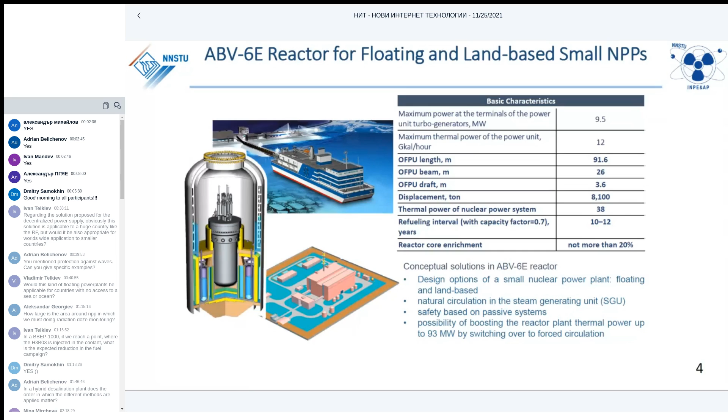The land-based small-sized nuclear power plant incorporating the ABV-6E reactor plant is a power source fitted with a land-based modular transportable power unit and equipment to load and unload the modules. The advantage of the modular transportable power unit is that protective waterside structures and special devices to transmit power to shore are excluded.

There is a possibility of setting the small-sized nuclear power plant far from water sources. Ice and tsunami protection is excluded. The modular transportable power unit has small overall dimensions and weight compared to a floating power unit.

This is what the floating power unit Akademik Lomonosov looks like, within the floating nuclear cogeneration plant in Pevek, Chukotka Autonomous Okrug, Russia. The floating power unit, the main component of the plant, incorporates two reactor plants. It is an upgrade on the reactor plant used in

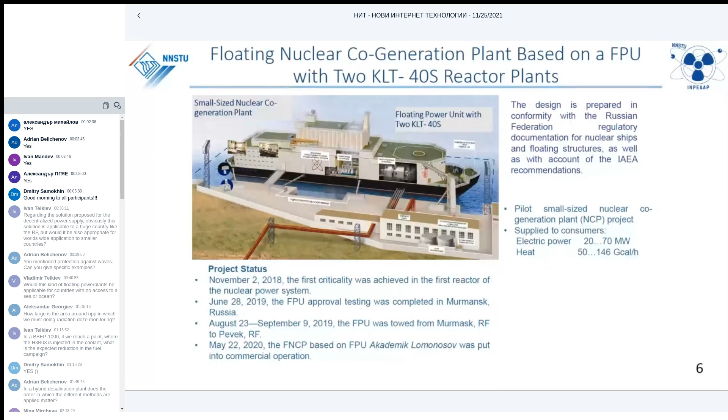The small-sized nuclear power plant has the following design options: a land-based small-sized nuclear power plant incorporating the RITM-200N reactor plant, and a floating small-sized nuclear power plant incorporating the RITM-200M reactor plant.

The land-based version of the small-sized nuclear power plant incorporating the RITM-200N reactor plant is designed to generate electricity. Additionally, a possibility has been provided for fitting the small-sized nuclear power plant with district heating and desalination plant if necessary.

The small-sized nuclear power plant includes the following buildings and structures: main building, special building for 2 units, pump station for supplying service water to the turbine building, administrative and living quarters unit, and others. The main building incorporates a reactor unit, turbine unit, and engineering system units.

As a power source for the small-sized nuclear power plant, the RITM-200N reactor plant is adopted. Accomplished studies have shown that marine reactor plants, thanks to their specific properties, enable the small-sized nuclear power plant to achieve the highest technical and economic performance and effectiveness. The design of the small-sized nuclear power plants incorporating the RITM-200N reactor plant conforms to the world's requirements and trends in the sphere of nuclear facility safety.

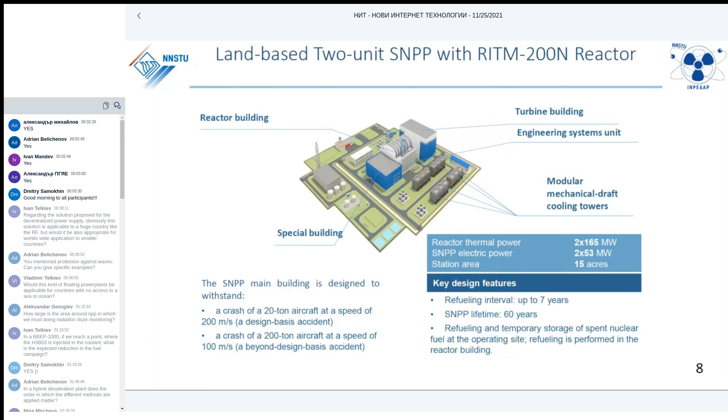One of the phases in developing the power sources based on the floating power unit Akademik Lomonosov is a floating version of the small-sized nuclear power plant design incorporating the RITM-200M reactor plant.

The optimized floating power unit with 2 unified reactor plants for the non-self-propelled version of floating nuclear power plants is a moored vessel analogous to the floating power unit Akademik Lomonosov, which has the nuclear power system incorporating the RITM-200M power plants installed on it.

The key optimized floating power unit advantages that determine its economic efficiency and competitiveness are the enhanced electric power and the long operating period without any refueling, at an entire life cycle of 60 years.

The unified basic engineering solutions and equipment of the nuclear power system and of the entire floating power unit allow the floating power unit to operate without refueling at the operating site until a factory repair.

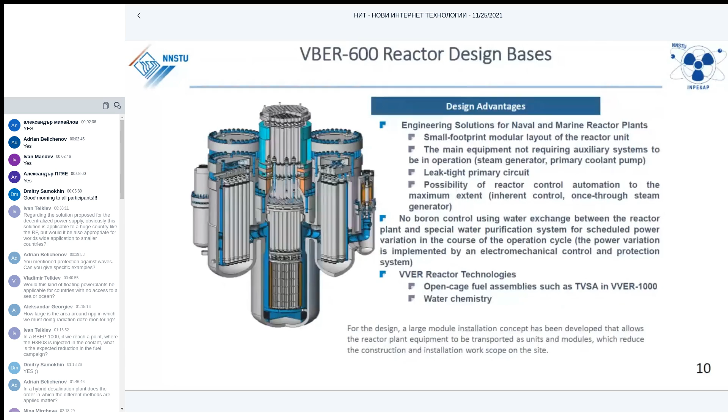The power unit incorporating the VBER-600 reactor plants has the following technical and economic characteristics: thermal power 1662 megawatts thermal, electric power at least 615 megawatts, and a service life of 60 years.

The VBER design solutions allow a wide power range of reactor plants to be developed on the basis of unified equipment, satisfying the entire spectrum of expected regional demand.

The VBER reactor plant designs under development have a high level of reference and cover the unit power range from 325 to 615 megawatts electric, because a loop-type layout is used.

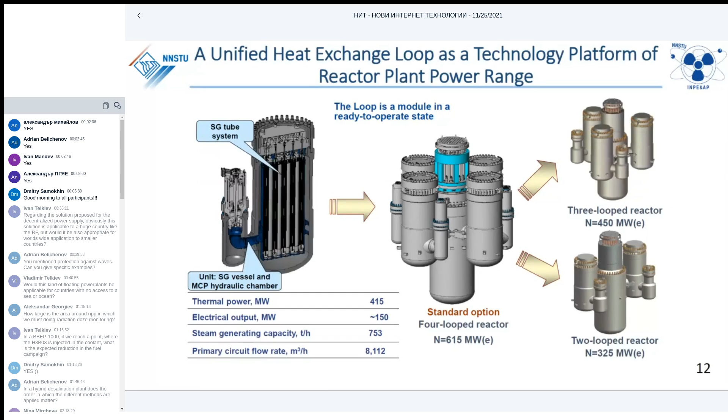General characteristics: the designs ensure high technical and economic performance and referencing in the engineering solutions used. Their safety is comprehensively validated and verified by many years of successfully operating analogs and prototypes.

The reactor plants for small and medium-sized nuclear power plants meet all the world's state-of-the-art requirements and trends in the sphere of nuclear facility safety. These reactor plants have advantages in terms of safety, mass and size characteristics, and technical and economic performance.

Now I will tell you about Nizhny Novgorod and the Nizhny Novgorod State Technical University named after Alexeyev. Nizhny Novgorod is an important economic, industrial, scientific, educational, and cultural center of Russia, the largest transport hub and administrative center of the Volga Federal District. The historic part of the city is rich in attractions and is a popular tourist destination.

In short, Nizhny Novgorod State Technical University, named after Alexeyev, is located in this beautiful city of Russia. Our university is one of the leading technical universities in the Volga Federal District. It occupies a leading position in the training of engineering personnel for enterprises of the nuclear industry. The university is a member of the Association Consortium of Flagship Universities of the State Atomic Energy Corporation Rosatom, and is one of the base universities from the Russian Federation in the IAEA regional network for education and training of specialists in the field of nuclear technology, STAR-NET.

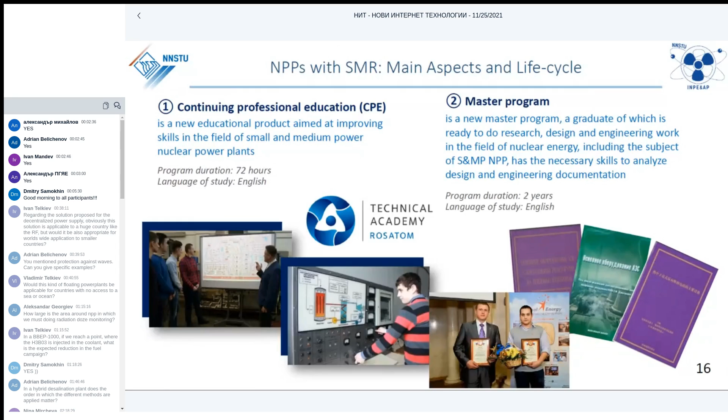Other topics include methods for solving engineering problems in the design of power plants, principles of nuclear power plant safety assurance, organization of a thermophysical experiment, organization and conduct of scientific research, modeling of heat and mass transfer processes for creating power plants, hydrodynamics and heat transfer in equipment of nuclear power plants, metrological support of thermophysical experiments, Rosatom production system in the design and construction of power plants, economic evaluation of the efficiency of decision-making in the energy sector, and tribological aspects of the design and construction of power plants.

It should be noted that for many years our university has been implementing the 'Education Through Science' program. Through this program, all students and masters have the opportunity to gain experience working and operating in unique research facilities - the basic laboratory of OKBM Afrikantov reactor hydrodynamics, where research is carried out with the aim of optimizing the design of promising fuel assemblies for nuclear reactors and increasing their unit power.

A multipurpose high-pressure open-loop aerodynamics test facility with an air coolant allows you to carry out the following types of work: substantiation of structural elements of nuclear reactors by conducting research work on the study of hydrodynamics and mass transfer of the coolant, and creation of a database of experimental data for verification of programs for three-dimensional thermal hydraulic calculation.

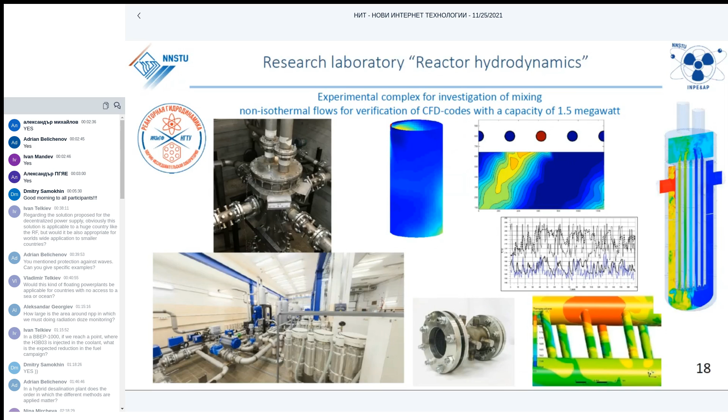Our university is ready to provide students with comfortable rooms in the modern campus. The close geographical location of Nizhny Novgorod and Moscow makes it possible to quickly transfer to our city, just 3.5 hours by train or 1 hour by plane, and you will find yourself in Nizhny Novgorod.

Taking a moment, I would like to note that this year Nizhny Novgorod celebrates its anniversary, 800 years from the date of its foundation. We have a great history and we have something to show everyone. Thank you for attention and welcome to Nizhny Novgorod.

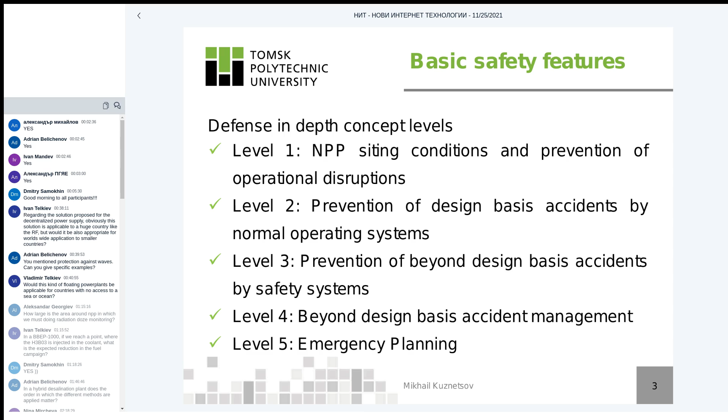So, in any case, according to the IAEA classification, our nuclear reactor must control and cover three main ways of safety. First of all, we must be ready to control the criticality and the neutron physical processes in the nuclear reactor, and we must be ready to transform it to the subcritical state and provide the procedure of the shutdown of the nuclear reactor.

After shutdown and transforming the nuclear reactor to the subcritical state, we must provide the cooling system and provide the removal of the residual heat from the nuclear reactor, and not only from the nuclear reactor but also from the spent fuel pool, which is stored under the water, and we must provide the cooling of this pool too. And the third one, we must control the concentration of radioactive substances under the containment and prevent spreading of it by active and passive safety systems.

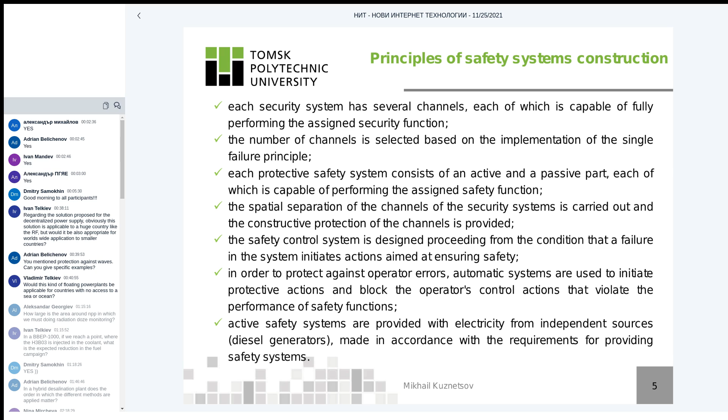The active safety systems are provided with an extra source of electricity, the generators, which are independent from the nuclear power plant electricity, and that guarantees that if we shut down the nuclear reactor, we have an extra source of electricity and our active system will be in order, and we can continue operation and control our nuclear reactor.

So some specific features of VVER reactor installations or power unit VVER technology: we must guarantee the coolant inventory in the primary circuit through the main circulation pump and pressurizers in any aspect, with the balance of mass and heat, the fuel mass and heat power.

We must guarantee the necessary amount of control rods under the screen, which is operated according to gravitational forces. This is the passive part of the CPS, control and protection system.

What else? The core power self-limitation properties must be guaranteed through the neutron physical properties of the VVER, and according to calculation, our nuclear reactors have a negative coefficient of reactivity. That means our nuclear reactor can move to the subcritical state by itself during operation. And using the passive components, which is strongly important for our safety system, which is isolated and realizes the restriction and tapping on different devices.

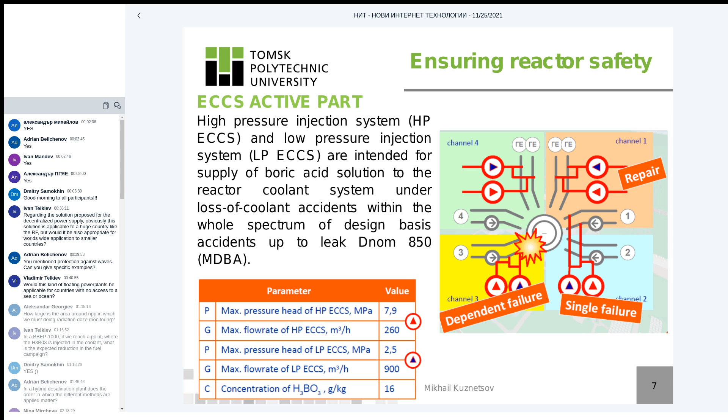And we can realize the emergency boron injection system not only in the primary loops but also in the pressurizers too, to guarantee heat removal from the nuclear reactor core.

Now the spray system, the last one, situated under the containment of the nuclear power plant. The main purpose of this system is to prevent the spread of radioactive substances and control the fission process too, if something happens with the nuclear reactor vessel and radioactive substances in gas or aerosol form start to spread under the containment, especially the iodine isotopes.

The spray system increases the concentration of water or special solutions like boric acid, which we already talked about, or hydrazine hydrate, using different chemical substances. We control the concentration under the containment, and the spray system can operate without personnel - the nozzles of this system are usually opened due to pressure under the containment, based on natural forces.

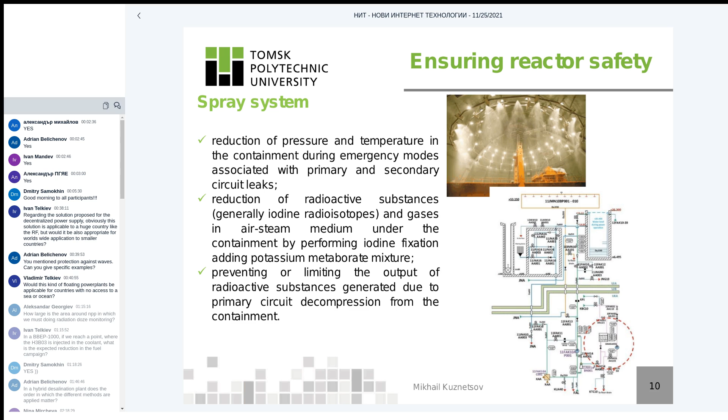The next one is the core catcher. It's a new safety system realized in the modern VVER project. You saw how it looks during the nuclear reactor building, and what is the main feature of this system?

It must prevent the spread of radioactive substances during the hardest accidents, when melting of the nuclear reactor fuel starts. You saw that the core catcher must support the bottom of the reactor vessel because it's situated under the nuclear reactor, and prevent the spreading of liquid fuel. During the hardest accidents it must protect the corium from thermomechanical impact and localize any liquid substances which can form during the accident, reducing the amount of nuclides and hydrogen released into the containment.

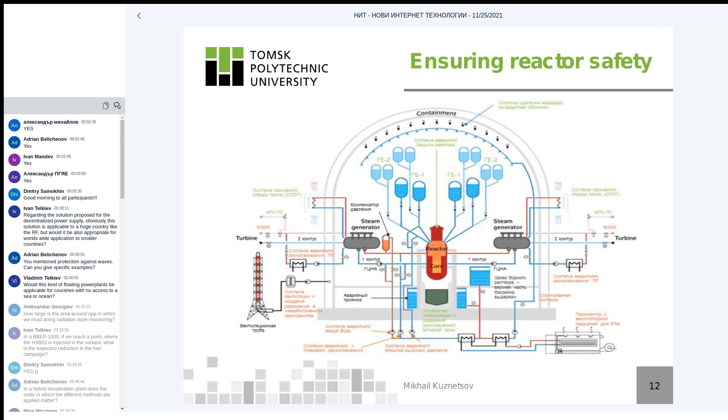If we look at the main scheme of the safety system of nuclear reactor with VVER-1000, you can see that in the center is our nuclear reactor, under it its core catcher, above the system of hydroaccumulators and nozzles under the containment, steam generators, which is connected to the emergency cooling system, a lot of tanks with boron solution and different chemical substances which are able to catch and collect the radioactive substances which can release during accidents, but which can also appear during normal operation. One more important system is, of course, the in-core monitoring system and ex-core monitoring system, which are guaranteed to get all necessary parameters during the operation of the nuclear power plant.

The ex-core monitoring system is a system of thermocouples and ionization chambers, which are usually placed in the containment and measure the temperature of the concrete and the vessel, and control the neutron flux and gamma radiation.

One of the important aspects of safety is, of course, radiation protection and the radiation monitoring system. In any case, around the nuclear power plant we must guarantee the sanitary protection zone and the observation zone, where we control the parameters of the doses of different radionuclides, and you saw in the picture the position of one of the Russian NPPs.

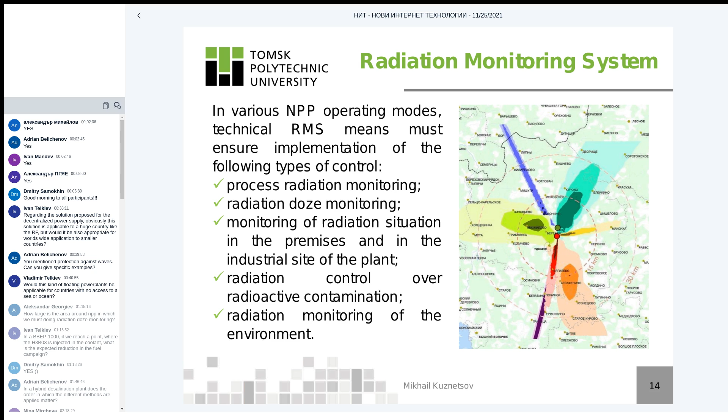So, as a result, nuclear power plants with the VVER nuclear reactor are based on technical solutions which have proved their reliability and effectiveness over more than 40 years of operation experience, because the first VVER nuclear reactor operating in the Russian Federation is about 40 years old.

And the development and implementation of evolutionary concepts of VVER give us one of the base safety principles, which we realize on different units and continue to improve, guaranteeing the efficiency of such installations.

And regarding the new project of the VVER, it's one of the branches of development of our state corporation and nuclear industry in common. You see the current projects: AES-2006, VVER-TOI, VVER-600, VVER-1400, and so on. And even under supercritical conditions of the coolant, these are installations which will be based on the balance of active and passive safety systems, optimizing different NPP designs. The VVER design needs to meet any modern requirements of Russian regulation and international regulation, and guarantee safety in any case.

So let's start. Today we will talk about 4 WH questions, which are the 4 essential questions about nuclear desalination. First, why desalination? It's important to understand its importance for us. Second, which methods? It's important to select the best and most optimum method for desalination. And how to combine a nuclear power plant with a desalination plant, because in the future you have many different energy sources for driving desalination plants, but we are going to select nuclear power plants, so we should define why we use nuclear energy for desalination. Finally, the most important thing for any technology is the economic evaluation, so we'll talk about the cost of nuclear desalination.

Probably you will think that right now we have many oceans and seas in the world, and we have enough water, so why do we need the desalination process? But here is a very important point: of course we have enough water in the world, but it's not usable. Almost 97.5% of total water resources in the world are not usable — they are sea and ocean water, which is salty, so we cannot use them as fresh water for drinking.

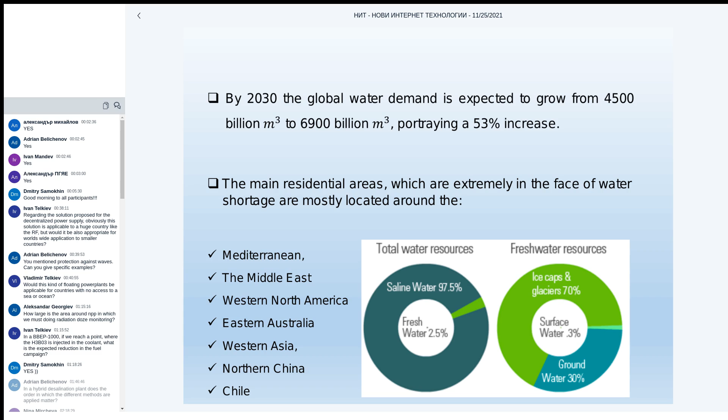But again, here we have a very important point. We cannot use all this 2.5% of water, because from this water, 30% is groundwater and 70% is ice caps, and we cannot use them. They are practically not usable. So just 0.3% of all the water in the world is surface water, and it can be used for domestic and industrial application. So we should think about it, and we should find a solution for solving this problem.

Currently, the best and most optimum solution for water shortage is seawater desalination. And many countries in the world are using this technology, this method. It means we can produce fresh water from seawater or ocean water, converting saline water from sea to fresh water. More than 150 countries in the world are trying to solve the problem through seawater desalination technology.

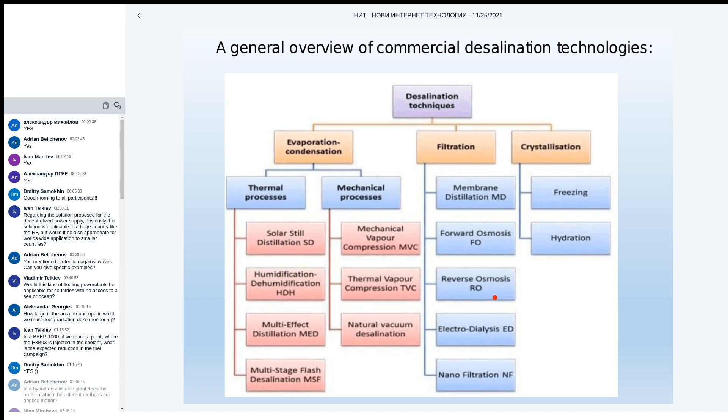Okay, so let's take a look at all these technologies in detail. Before that, we want to talk about the essentials of a seawater desalination plant.

For any seawater desalination plant, we have two inputs and two outputs. So what are the inputs? First, we should have feed water, which can be supplied by water from sea, ocean, or even brackish water. The second input parameter for a desalination plant is energy. We should supply the required energy for the desalination plant. We have many different sources for supplying energy, like for example a thermal power plant, nuclear power plant, solar power plant, wind, and many different types of energy sources.

So this is the second input. And what about the output? We have two main outputs. First, product water, or the fresh water that is produced, which is drinkable and we can use it. The second one is the rejected brine, or the water that couldn't be treated. So these are two outputs. And the core of the technology is a separation unit. In the separation unit, we can have thermal or membrane technology, as I explained: thermal like MSF and MED, and membrane like RO technology.

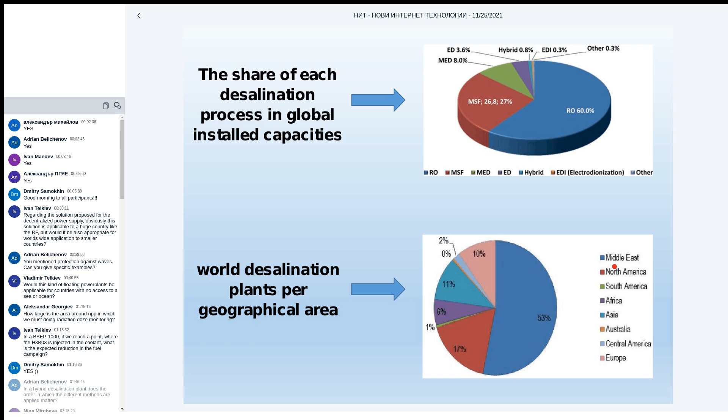And what about the world desalination plants per geographical area? You can see that 53% of all the desalination plants are located at the Middle East, meaning these countries are facing a very serious problem with water shortage.

So let's take a very brief look. We don't have enough time to talk about the details of this equipment, so just very fast we'll look at them. Multi-stage flash, or MSF distillation plant - the structure is very simple.

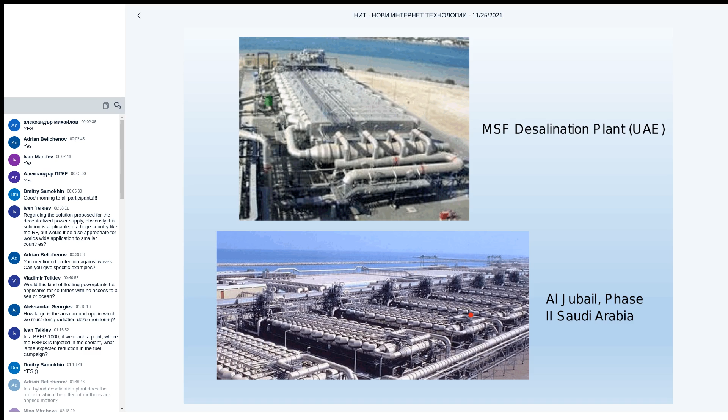You can see some real schemes and real sites or plants of MSF in different countries like UAE and Saudi Arabia. The second one here is the biggest desalination plant in the world.

And finally, the RO desalination process. In this technology, water with a high level of salt is pumped through a membrane, and the salinity of the water decreases after passing through it. On the right side we have fresh water. So it's a kind of filter, a filtration method, and we can use it for producing water.

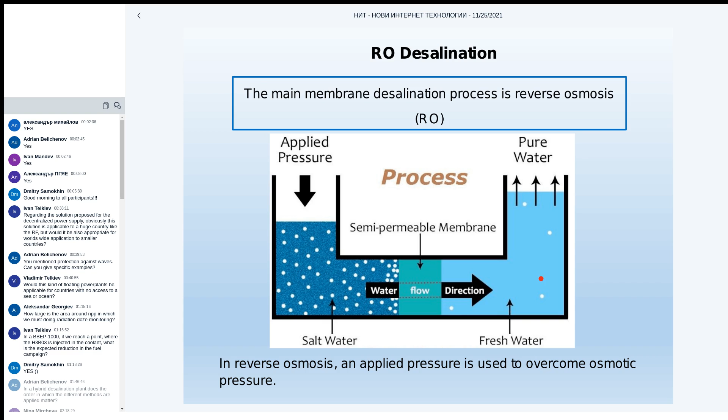What about hybrid desalination plants? Currently many governments and researchers are interested in working with hybrid desalination plants, meaning we use a thermal desalination plant like MED or MSF plus an RO desalination plant. This technology has many advantages compared to a standalone desalination plant - for example, the intake water from the sea decreases.

Providing the infrastructure for intaking water from the sea is very expensive, even for a nuclear power plant, a thermal power plant, or a desalination plant. So by using a hybrid desalination plant, we can decrease the volume of water that should be extracted from the sea, and also improve the quality of the produced water.

The quality of produced water is very important, denoted by TDS, total dissolved solid, measured in ppm. For example, the TDS of drinking water for domestic application is almost 400 to 600. Using a thermal desalination plant, we can produce very high quality water, while using an RO desalination plant, we can produce not very high quality water. So by combining these two types of water, we can produce a very good and usable water for drinking.

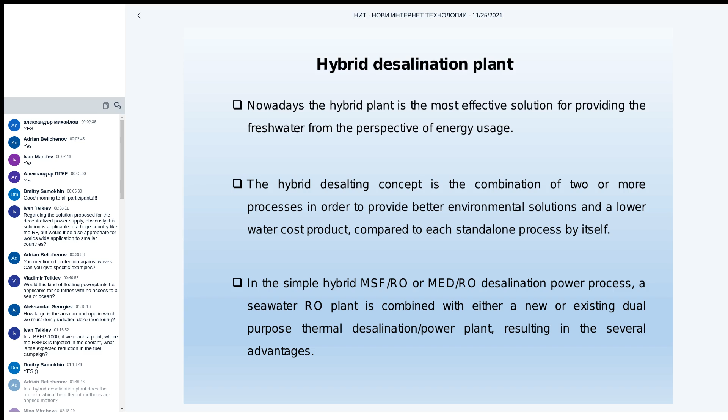And of course, we have many more advantages, but let's finish it here about hybrid desalination, because we don't have enough time to talk about all the advantages. Generally, it's a very good option for producing fresh water.

So the most important thing here is supplying the required energy for nuclear desalination plant. As I told you, we should supply hot steam for thermal desalination plant, and also we should use a very powerful pump for supplying the energy of RO desalination plant. Because if you want to put pressure on water to pass through the filter, you should use a very powerful pump.

Of course, for driving this system, we need energy. But which type of energy can we use? Fossil fuel? No, we cannot use that. Of course, we can use it, but it's not logical because of many disadvantages of fossil fuels. We don't want to use them. If you want to achieve the net zero emission goals, we cannot use fossil fuel, also because of producing carbon dioxide, and other reasons. We don't want to use fossil fuel.

What about solar energy? Is it possible? Of course, solar energy is also a very good source of energy, but again here we have a very big problem. That is, if you want to produce many thousand cubic meters of fresh water per day, then solar energy is not enough for our work. We need a very big land. It's even sometimes more expensive than, for example, fossil fuel. And it's not logical to use solar energy for large scale desalination plants.

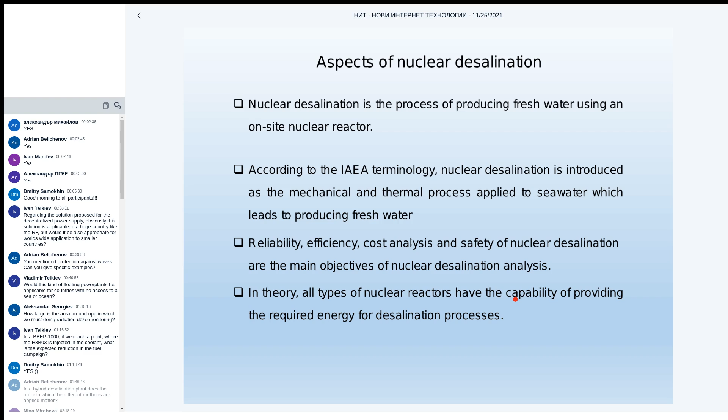In theory, all types of nuclear reactors can be used for supplying the required energy for a desalination plant, because the most important things for driving the desalination plant are heat and electricity, these two forms of energy. Electricity is the essential product of all nuclear power plants in the world, so easily we can use electricity from a nuclear power plant. And the second one, heat. Of course, we know that all nuclear power plants can produce heat. At the second cycle of the nuclear power plant, we can install a kind of plant to extract steam from the turbine building and use this steam for driving the desalination plant.

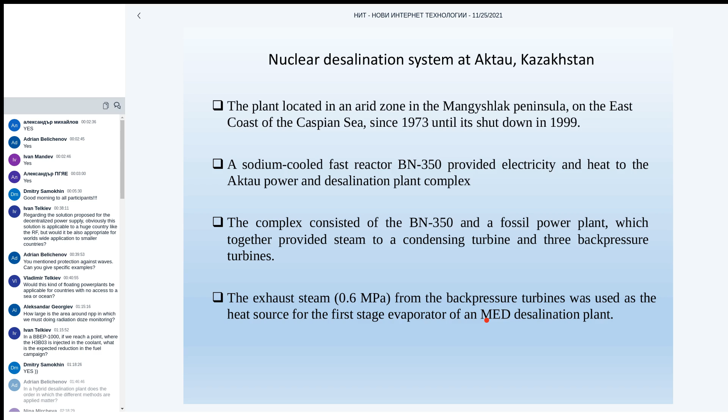Of course, we can connect a nuclear power plant to a desalination plant in different ways, but here I want to share with you 4 important schemes, and they are very easy to understand. The first option is a simple hybrid scheme. The next one is an integrated hybrid scheme. The third option is use of cooling water of nuclear power plant condenser as feed water of the desalination plant. And finally, using MSF brine as the feed water of MED. Let's take a look at all these schemes - the first one being a separate desalination plant: MED, MSF, and RO.

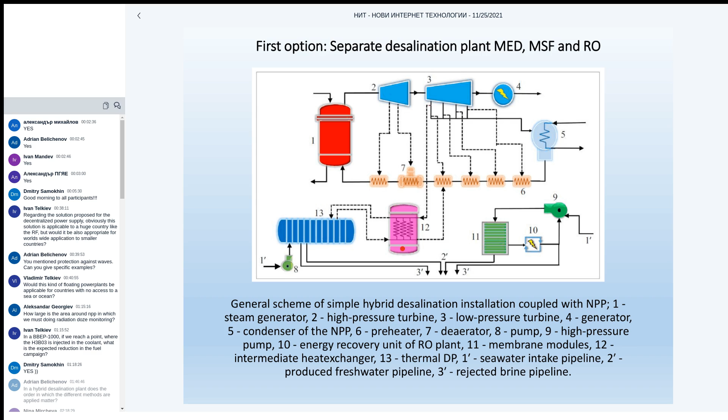In this part, we have the RO system, and this is the MED or MSF system. Also, we can extract the steam from the low pressure turbine or high pressure turbine and give it to the intermediate loop. This is an intermediate loop between a thermal desalination plant and nuclear power plant. It's very important for increasing the safety aspects of the site - to avoid any emission of radioactive material through any accident in the reactor, we have to use this intermediate loop. This is a very, very simple scheme.

The next scheme is that we can produce water by the RO desalination plant, and the rejected water, the brine water, can be given to the MED plant as feed water. So in this scheme, the cost of intake water infrastructure decreases.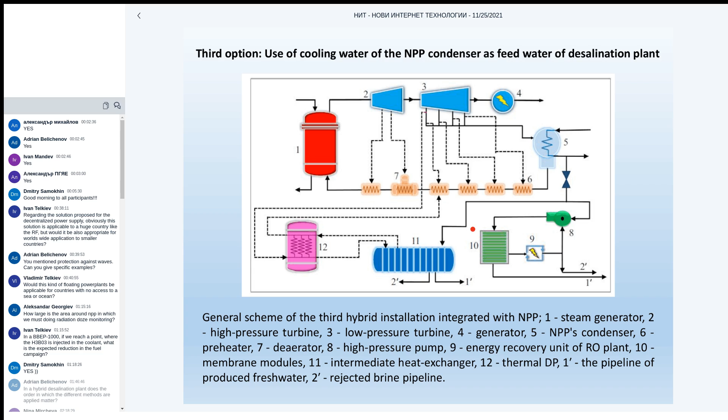And the next one is a very optimum method. In this scheme, we can use the rejected water of the condenser of the NPP, or nuclear power plant, as the feed water of the desalination plant. In this scheme, we totally remove the cost of intake water infrastructure, and the cost in this scheme is very, very low, and also very easy to implement on site.

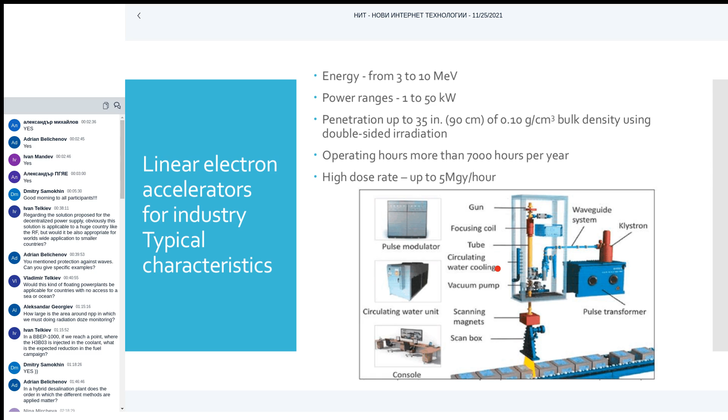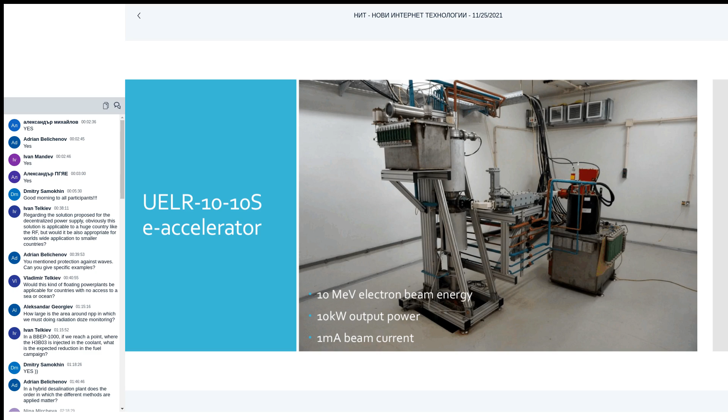Next slide, it's our accelerator after upgrade. We changed the old French klystron, the red one on this slide, to a new Russian klystron. It's a spare part and needs to be changed periodically.

Main computer, video control unit, dosimetry system, and blocking system, and also oscilloscope to control waveform.

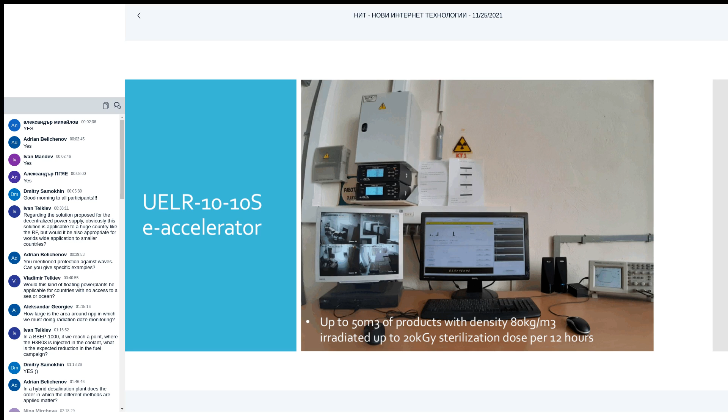Advantages of electron beam technology: it's a well-known technology, about 100 years old. Simplicity of construction - you need just a tube, a klystron, and a few engineers. High parameters stability, about 3-5% stability in beam current. High beam power, which means high yield of products.

Narrow energy spread - you have your beam only in the place you know well, and you put products here. All other places are free from irradiation. And wide range of power adjustment - you can change the power on demand.

Disadvantages of the technology: it's a limited lifetime of klystron or magnetron. It depends on design - you need to buy a klystron or magnetron periodically, from 1000 to 5000 hours.

High electric energy demands - if you have 10 kilowatt in beam power, you need about 70 kilowatt for your facility. Poor accelerator availability.

Limited energy variation - you cannot change electron energy as you like, it's often a very limited range. Difficult spare parts availability is also a problem, because often you have some parts very new and not in serial production, some parts old and out of stock, and other parts with very high price to buy.

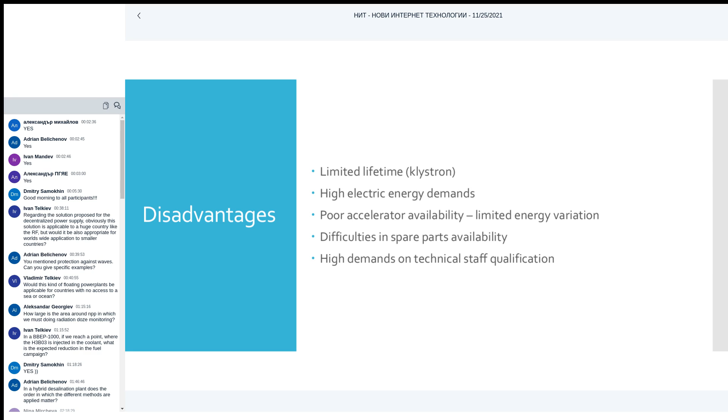So we start with our accelerator experience. We will talk about the power modulator, about high humidity in high dose rate field, about the start-stop system for e-beam and conveyor, about the human access blocking system, and the irradiation chamber video control unit. You will see an example of a problem and an example of solving this problem.

Typically you have no problems if you run the accelerator for 1 or 2 hours per day. When you start to work, for example, 6 hours, you will have some problems with its stability. For 12 working hours, it will be the next set of problems.

Example of problem: a limited working temperature range of electronic components like condensers, resistors, microcircuits. Solution: add additional air ventilation for the modulator room, add a local fan for better cooling and temperature stability.

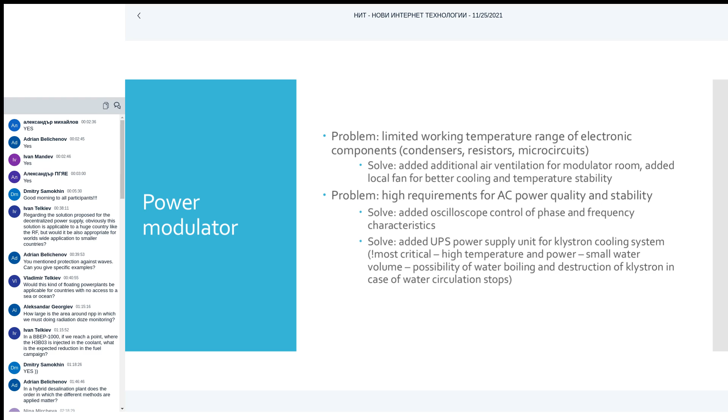New demagnetizing scheme for pulse transformer. Some pictures to show upgrades.

Another problem: high requirements for power quality and stability. Solution: add oscilloscope control of phase and frequency characteristics, and also add a UPS power supply unit for the klystron cooling system.

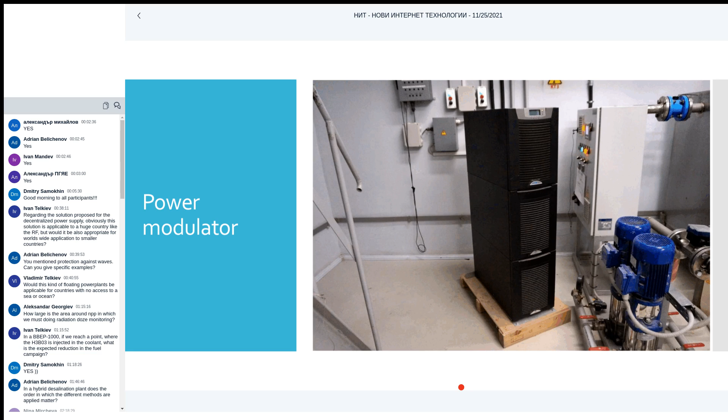This is most critical because of very high temperature, high power, and a very small water volume inside the klystron. The water can boil if you stop the circulation of water for cooling of the klystron. In this situation, the klystron can be broken.

Another problem: humid air irradiation leads to nitric or nitrous acid generation inside the irradiation chamber. Acid vapor destroys accelerator parts and electronic components.

Solution to this problem: the most critical electronic components are protected with high purity silicone lubricant to keep the electric connection.

Another problem: software and microcontroller faults leading to irradiation of products with a stopped conveyor, risking fire. You have very high power, about 10 kilowatt, you send it to the box, you irradiate, and if you stop moving the box, all this power is concentrated in one box. In a few minutes, you will have a fire in this place.

We developed a low-level electrical blocking system for prevention of such cases. There is a possibility to deactivate it for accelerator maintenance and tuning.

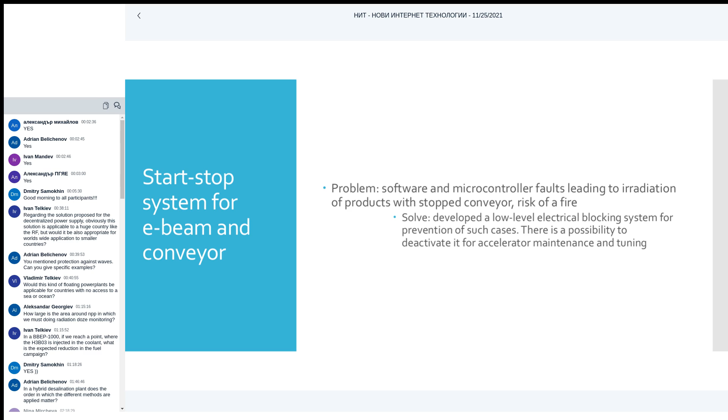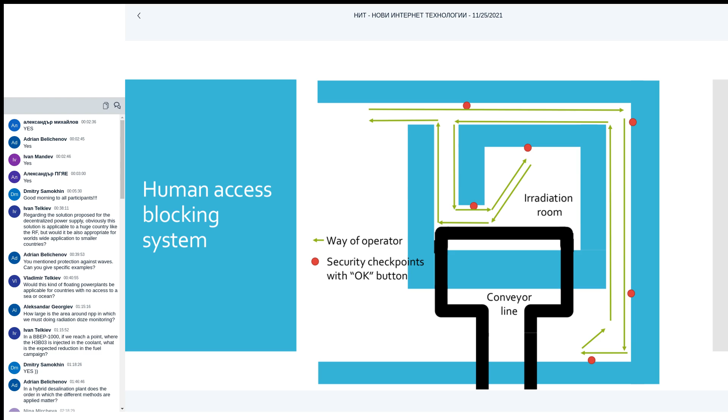The operator needs to go through the perimeter of the limited access area before starting irradiation to be sure there are no humans here. We have a few checkpoints with a button to press if everything is okay, so every corner is checked and we start irradiation. Looks like this slide.

Another problem: camera optics darkening and CCD sensor degradation in high dose rate fields due to radiation defect generation. The camera unit is placed out of the e-beam's direct view, and a polished stainless steel mirror is used to see the image behind the corner of the irradiation room.

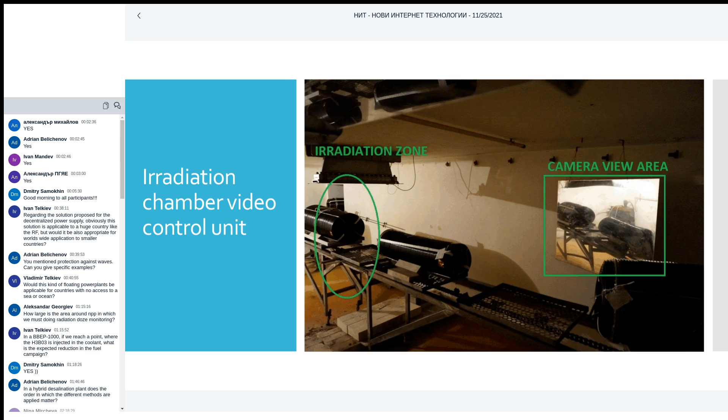Going closer to our everyday work and to irradiation. You know this idea about good, fast and cheap - select any two you prefer.

In our area of work, quality is regulated by law. You cannot do your work badly because you will be shut down. If you say you do sterilization, you must do it.

To talk about speed, you need to do it as fast as possible to irradiate more products. We can modify techniques, we can optimize people's job and use working time more effectively. The way for our customer is to find the best packaging - not too heavy, not too light, and so on. I'll show you later.

We need the products to be irradiated at any place in the conveyor, so we tune our beam to provide heterogeneity of about 5%.

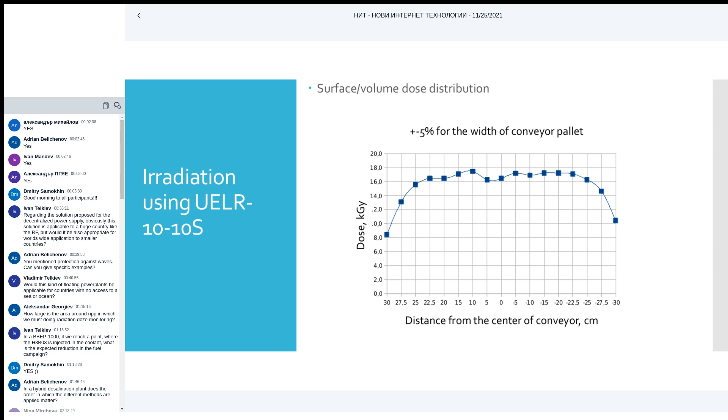What we do to help our customers is explain how it works, how dose distribution depends on density of products and so on, how we can correct the packaging of materials and products.

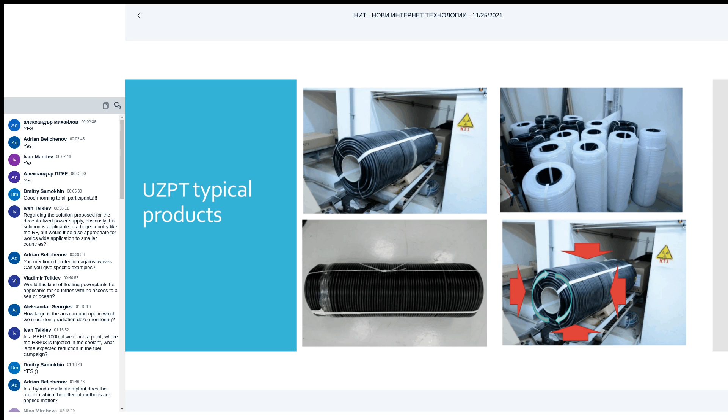Another product we have is polyethylene tubes. We radiate these tubes to give them thermoshrinkable properties. We use four-side radiation for these tubes.

According to our measurement, we have dose distribution in the range of about 120-150 kilogray, with maximum situated from top, bottom, left and right side. Sometimes the maximum dose is situated in other regions, and it depends on tube diameter and thickness.

This situation we have according to dose distribution I showed earlier. So first of all, we check for such a product the dose we need to be sure that we can enlarge tubes after irradiation.

We measured how much time we need to rotate them - 2, 4, or maybe 6 times. We gave recommendation to do a 10 centimeter layer for this packaging after first measurements. It was an 8 millimeter tube with 1 millimeter wall thickness.

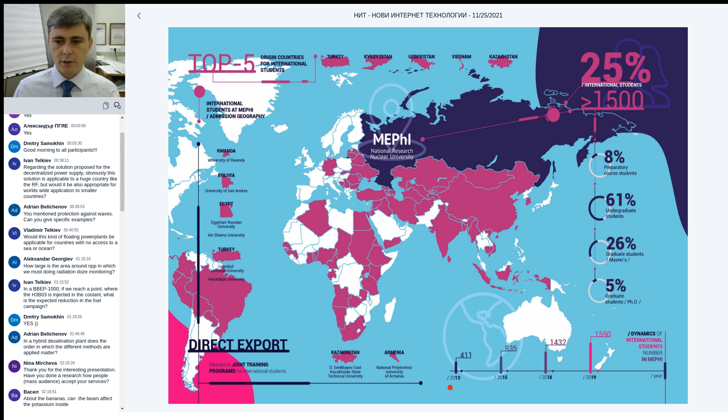First of all, it's all Asia, Eastern Europe, Latin America, Africa, and so on. Actually, all international students are divided between Moscow side of our university and Obninsk. Obninsk is a really small town, not city, maybe 100,000 people, 100 kilometers away from Moscow. So it's the nearest branch from Moscow, and we have a lot of international students there.

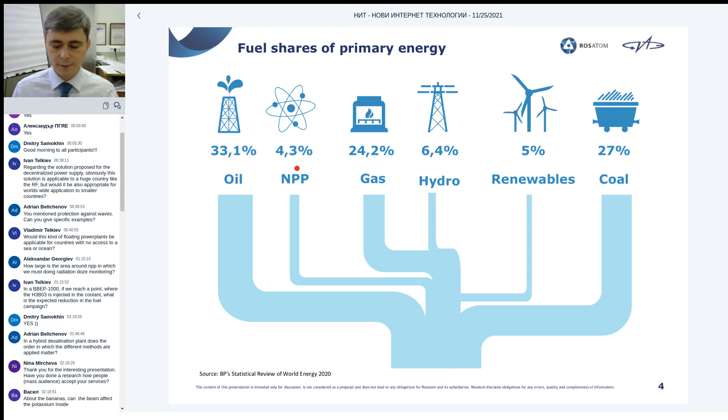Nuclear in some countries, like United States, like in Russia, is a significant sector. Like France, maybe now the only example, because France is number one in share of nuclear, more than 70%. But in some countries, for example Latin America, hydro is great because big, powerful rivers are enough to provide a lot of electricity from hydro stations.

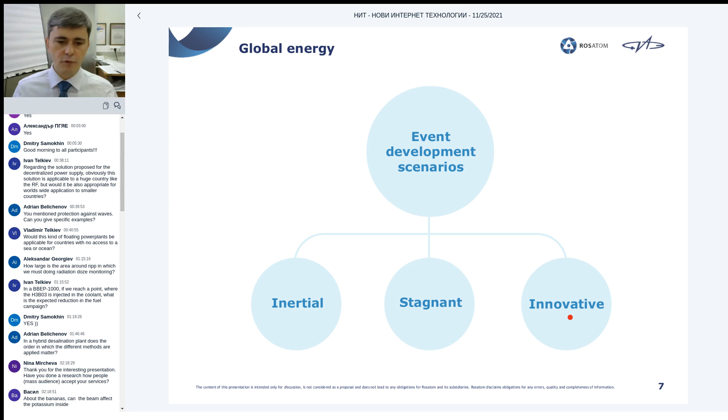Inertial - it will be like nowadays, as is, roughly the same number of power plants, the same volumes, and so on. Stagnant - as usual, worst case, when there are no new objects, but old objects will be decommissioned. And innovative - it actually means developing something new, really new sources, significantly improved constructions, and in this way we can go further.

And priorities - priorities in the European Union, in different countries. First of all, energy saving. Of course it's worth saving energy because it's very expensive to get new energy from new sources. First of all, it's a good idea to realize different measures in this field.

Environmentally friendly technologies and pure technologies - not only at the stage of operation of plants, but it's very important to talk about this feature for the whole fuel cycle. And in this way, many renewables are not so attractive, really. And the use of new sources as the basis of development.

But nowadays, right now, renewables, I guess, are a little bit overestimated, because it's not so simple to develop in this way.

About technologies of power production, I will go very briefly, because my colleagues from our universities really explained many points from this area today. First of all, if we talk about where nuclear power is right now, for the Russian Federation it's generation 3 plus, because generation 3 is the traditional power plants which were put into operation starting from the 90s.

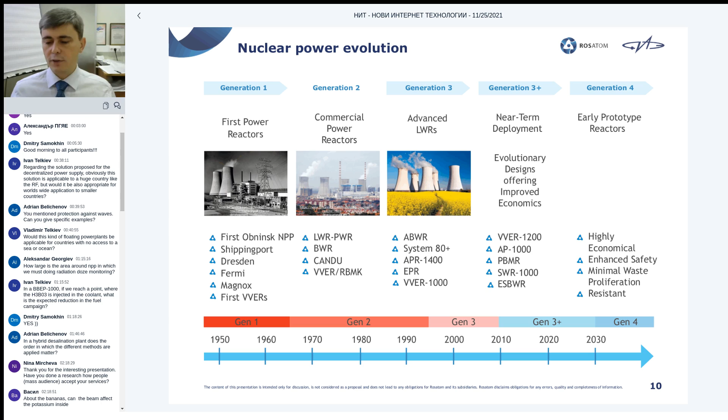Basically, generation 3 plus can be characterized by a significantly higher level of safety of nuclear power units. And my colleagues from another university, from Tomsk, talked about the safety of nuclear power plants in detail today.

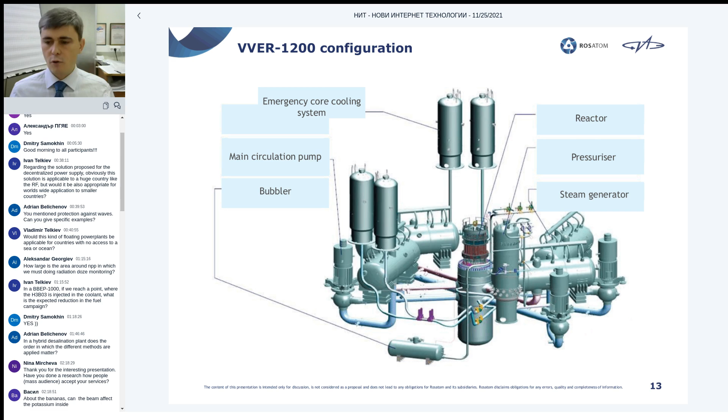So on this slide you can find some explanation of the basic ideas laid inside the safety paradigm of VVER 1200. Parameters were really announced today about different values. And here's an overall view of the primary circuit with all equipment.

So about some outside conditions - outside meaning referring to society, to the economy, in some country.

And nowadays, I guess you know it's a complicated situation in the European Union, because of different political reasons, first of all political and economic reasons. And yes, price may change differently between different countries, and moreover price is very volatile - one day the price may change several times.

And of course it's very important for every country, because the price of electricity, the cost of electricity, is actually like blood, maybe, like the main substance of every economy, because a lot of, maybe not all but the majority of, equipment, drives, and different facilities all around us really should be supplied by electricity. And of course all our households, all our homes should be supplied by electricity. So the price is different across countries.

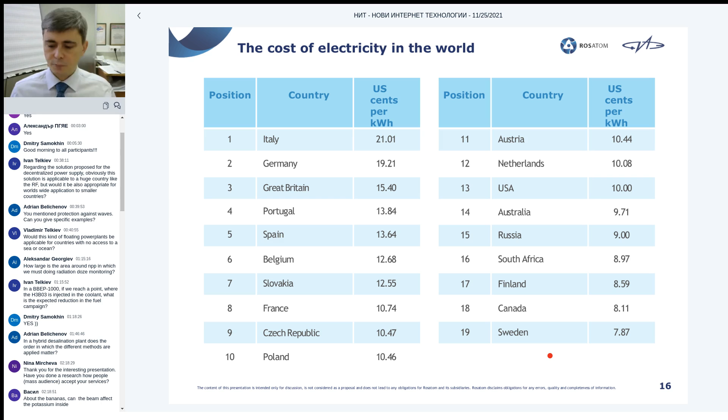This part is central to my presentation today, because after my presentation, my colleague and friend Mr. Samokhin will announce together with me the task for our participants for this hackathon. Our idea is that participants should pay attention to analysis of nuclear among other sources of generation.

It's important, because if you say some source is good or bad of energy, anyway you should add good or bad according to something. You can say nuclear is better than coal with some explanation, but there are no terms about bad or good without any comparison.

About renewables, because nowadays in Europe especially, the general idea is that coal is a dirty source, and it's known information, because if we compare, coal in general will give the main volume of gases, greenhouse gases and pollutants in the atmosphere, at least.

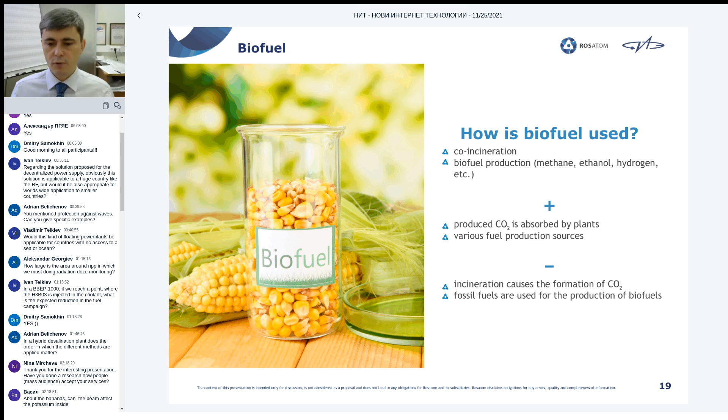About wind - from one side, the idea to use wind is really the oldest, not 100 but 1,000 years, if we talk about ships and so on. But the idea of how to produce electricity from wind energy is actually rather new - to install a special mast with a propeller or fan on this mast with a special generator. So yes, wind blows, this propeller rotates, and the generator produces electricity.

This is very harmful for human beings around and for animals, and both offshore and onshore wind masts are really harmful for birds, as I know - some source of damage for them. As an unlimited source, yes, wind is really unlimited, and if you have some places in a country with really strong winds during many days per year, it's a good idea to use this energy.

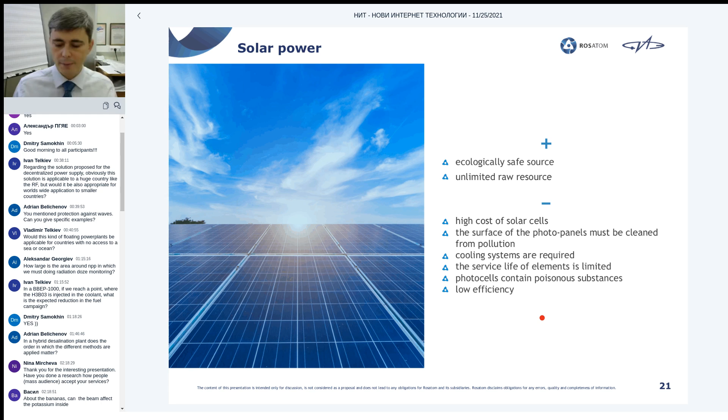So hydro - ecologically safe, I think yes, because anyway there are issues regarding fish in the upper part of a river before dams. But as usual, as I know, there are special channels just to provide for migration and so on. Anyway, it intervenes inside the environment, but it's ecologically safe.

Low cost of energy production - yes, just after construction of an expensive and big dam, this dam can be used for dozens of years, 100 years, very long time. You will get money for electricity and you only need to spend money for maintenance and repairs.

Minuses: flooding of agricultural lands and populated areas - yes, you lose territory in this way. Water balance disturbance, of course. And climatic effects, because creating big artificial lakes will of course provide some impact on the environment.

And danger of major disaster - yes, if a dam breaks, it will be a huge disaster for all cities below this dam along the river. As I know, for the biggest energy plant in the world, Three Gorges in China, on the Yangtze River, in case of total damage of the dam, I guess there would be maybe millions of victims, because these are very highly populated areas around, so it's a very risky situation.

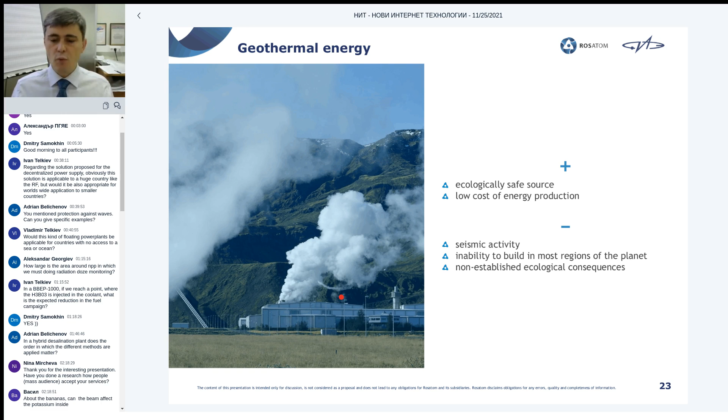Geothermal energy, really, it's exotic, I guess. In Russia, which is a big country, in the Far East, on Kamchatka, there are special plants where we use thermal energy from geysers, from thermal springs from the ground. But anyway, it can be used only in some specific regions.

Hydrogen energy is a very hot topic in many countries - how to use hydrogen for cars instead of gasoline or benzene in different production facilities. It's ecologically safe in clean form, high efficiency, and an unlimited raw resource, because hydrogen is the number one element in the universe if we talk about its quantity.

But there's one drawback, a very big one: high explosion hazard. Everyone knows hydrogen is a very explosive substance, and we have to make huge efforts just to avoid a possible disaster.

So about the future of nuclear in this sense, first I'd like to say the usual fuel cycle is known, I guess, to you. But first, in Russia nowadays, the state of the art research is directed first of all at closing the nuclear fuel cycle. Closing means not just to find uranium in the ground, extract it, produce fuel, use this fuel at the nuclear power plant, and then dispose of it. That's the usual cycle, and in this way, I guess our usual uranium in the ground will be enough for maybe 200 years.

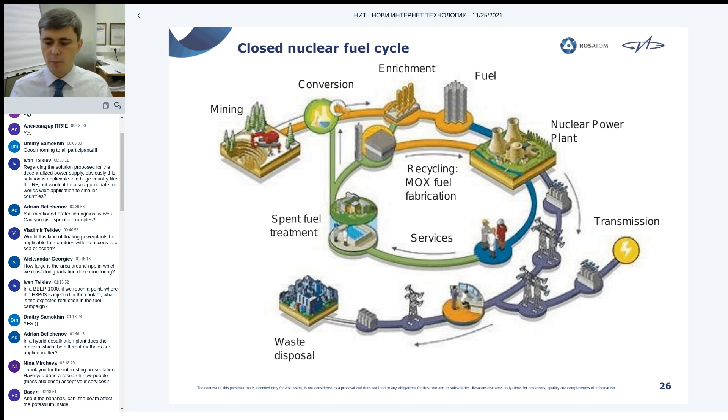But if we manage to close the fuel cycle, it means to reprocess spent fuel, extract different valuable isotopes, and use isotopes for new fuel as well. If we can organize the process this way, we can increase the time of operation for nuclear technology really to 1,000 years. Of course, we're talking about fast reactors here. And nowadays, Russia is number one in the world in terms of operational experience.

It may sound like fantasy, but it's not so far off really - using nuclear for space, for example, like a space engine. Traditional sources for space launchers nowadays have probably achieved the highest point possible, because it's very hard to improve something when the technology is more than 60 or 70 years old. So nowadays mankind needs something new, some new technology to take the next, principally next, step in this area.

So a nuclear engine is possible. Moreover, the Russian Federation has operational experience with nuclear in space - we talk about special satellites, but now we're talking about a special nuclear engine. Nowadays, Rosatom State Corporation in the Russian Federation, together with Roscosmos Agency, is really trying to construct the first spaceship, maybe with a nuclear engine on board. So we have a chance to see results, of course not in a couple of years, but maybe in a decade.

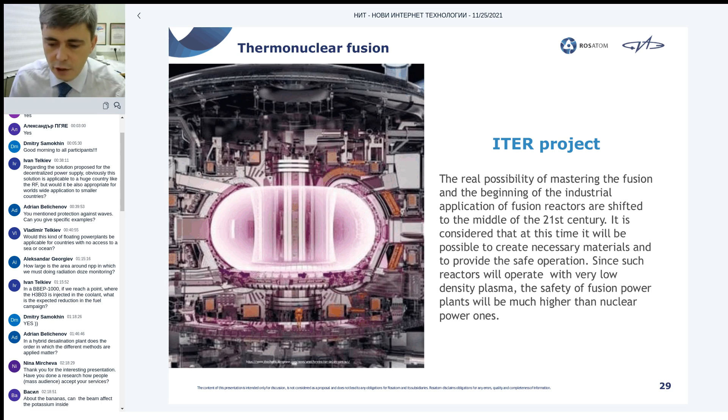And of course, if we talk about something like nuclear but actually it's thermonuclear - a fusion reactor - nowadays the ITER project is the top project in this field. This project has been constructed not by one country but by a consortium of many countries: European countries, United States, Russian Federation, Japan, and so on. If I remember right, in 2025 they say they'll provide first electricity, or at least start up and try to get energy from this facility.

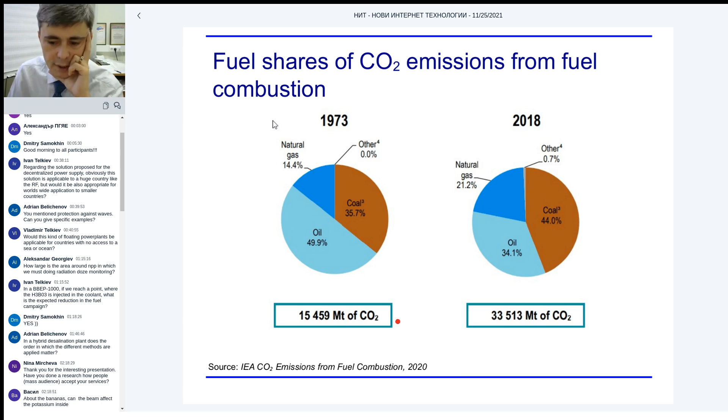But after completion, during operation, the only effect on the environment is the thermal effect, because we need to take water to cool condensers of the turbine - from cooling towers, special basins, artificial ponds - and of course the warm water after the condensers is returned back.

In this way, we have some microclimate around nuclear power plants. It's not so great maybe, some impact, but not so bad like others actually. So nowadays we can say nuclear energy really is green energy.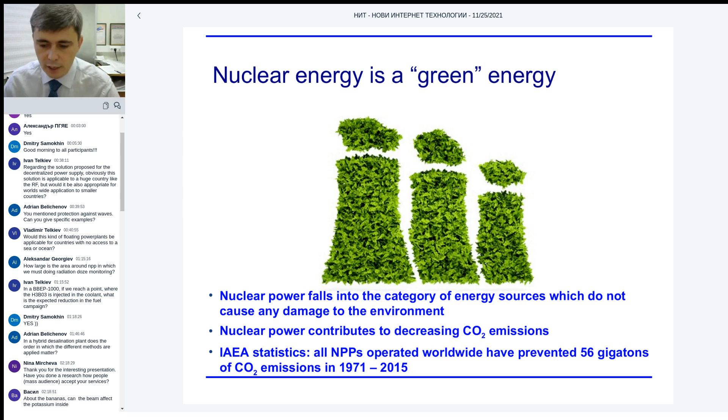But if we talk about green, yes, it's green as well as all others which form the so-called green square, because we have 4 main green sources: wind, hydro, solar, and actually nuclear the same.

So my idea during this presentation is that really, nuclear nowadays is a technology which has significant operation experience, and this technology can be used just to get clean, stable electricity production in many countries all around the world.

So thank you very much for your attention, because I know it's time to go to the task announcement. So if you have some questions, please.

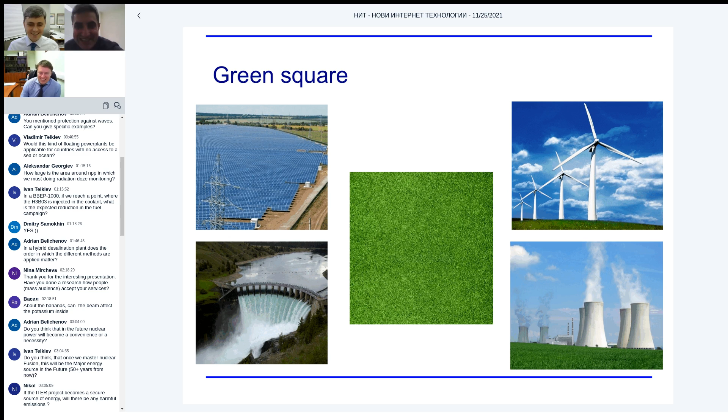Now, let's... Plamen, please. Thank you very much once again for my presentation. I think you can close in this position. Now I'll go to Mr. Samokhin in his room, because actually we are on the same floor, and we will go to announce the task. Let me finish, please. I should announce that time is coming for giving the task - the most important thing while we are together here today. So you are passing the microphone, I am telling what is coming.

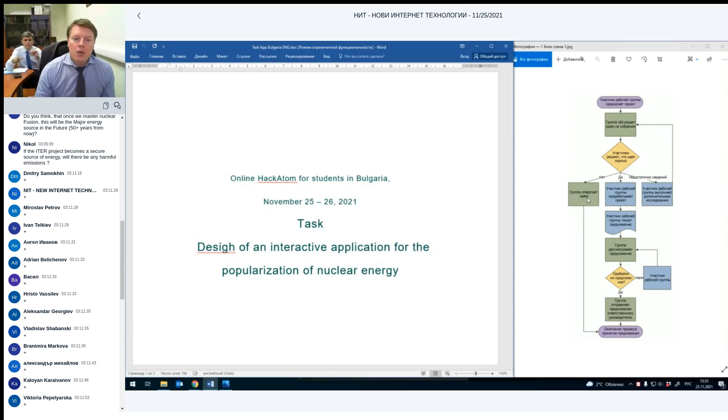When I think about how to explain your task, I was not sure about including this picture on my screen monitor or not, because we have an exotic task, and I think many of you will have your own opinion about how to realize our task. But in any case, I think this picture will help us.

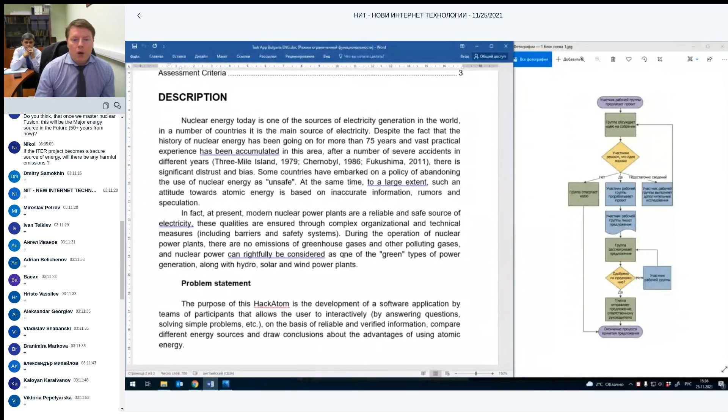And we have a next idea for our simple task. Our task is dealt with nuclear technology, because, as I understand, we prepared different lectures, and all the lectures have nuclear application, and not only nuclear application. Our main idea for this task, for each team, includes the following.

Each team must prepare something, and I explain now what it is. This is a product result work of this team, and it will include information about different sources of energy.

For example, think about if we go to a preliminary school and we want to involve the young generation in the nuclear sphere, and how you may explain about nuclear energy, why nuclear energy is so important for us.

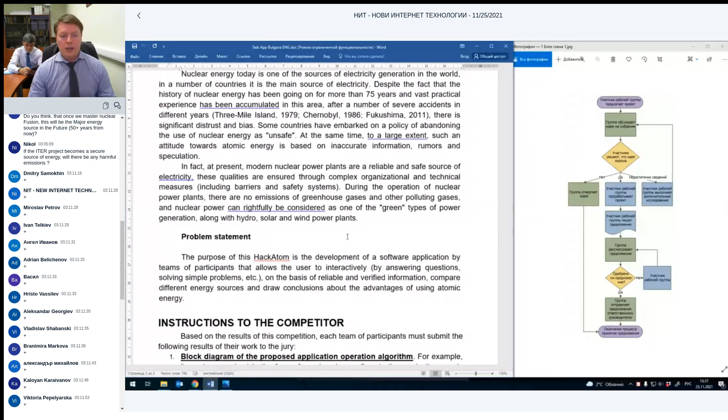And how we may save our world for future generations. Our main idea for each team must prepare it like a quiz. It's maybe not like a real quiz, more like a computer program software. And it's not so easy to sit at the computer and directly start preparing software.

First of all, you must design a block diagram. It must look like an algorithm for your program. One example here, and another example here, and the final result of your work. You must prepare three documents, three parts. First of all, this is a block diagram, and this block diagram must include your opinion about step-by-step realization of your computer program software.

And this diagram must include a question, maybe a simple task, maybe a picture example, for example comparing nuclear energy and wind source, and a picture with nuclear power plants or an experimental reactor, and a picture with other electrical equipment and others.

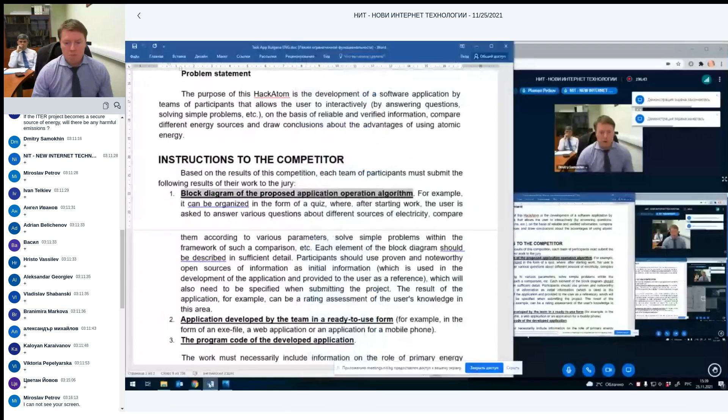Dmitry, sorry for the interruption. Somebody cannot see — Miroslav is saying that he cannot see the screen. I think it's just for Miroslav, because he's joined from his mobile. So, okay, sorry, maybe he just minimized the screen. Mobile is a different story. Okay, sorry, you should find the nearest computer.

Yes, or okay, sorry for the interruption, Dmitry, please continue. Okay, because previously I asked participants to add a symbol plus if they hear me and see the screen monitor, and many of our participants wrote the plus symbol in the chat. It means everything is okay.

Repeating again: first result of the work. Each team must prepare a block diagram, and you may realize the block diagram in PPT format, or for example Visio, or draw it by hand and make a photo. But your block diagram must be clearly understandable for the jury, with step-by-step questions, and maybe returning to a previous level and asking again, and other directions, and next.

Second result: this is a real application developed by the team in different software. For example, you may use C++, Delphi, Python, or maybe an internet application, I don't know — it's mobile application, is Java allowed?

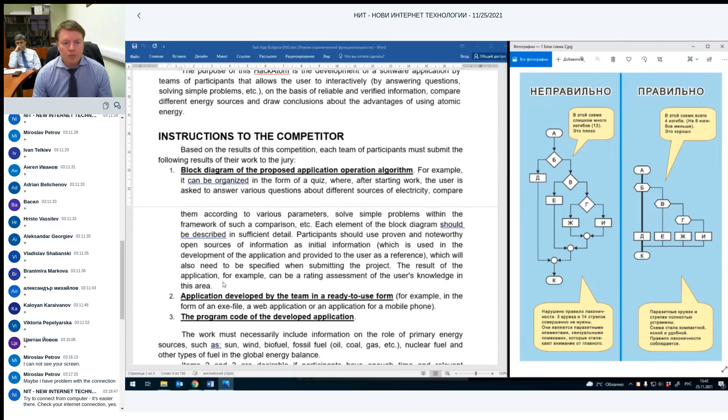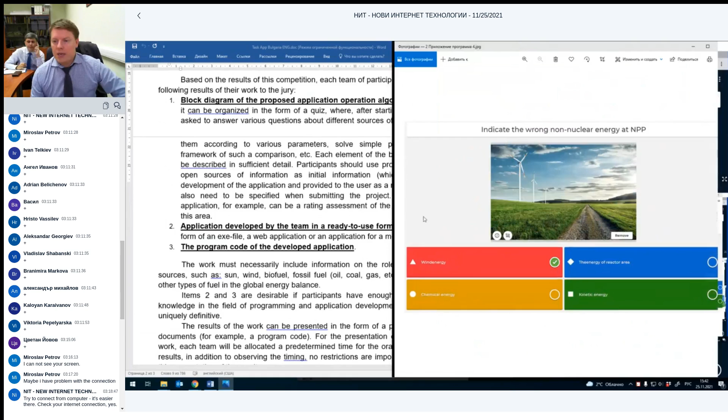And third result, for example, this is how the diagram looks like, and how the application may look, and the result working application, like a quiz, like other views, for example.

And the last part, this is open code development application. If you use your own code, you must submit this code to the jury. And of course, for example, if you realize HackAtom with an internet instrument, of course one of the software may not have open computer code, and in this case you will have only block diagram and application software.

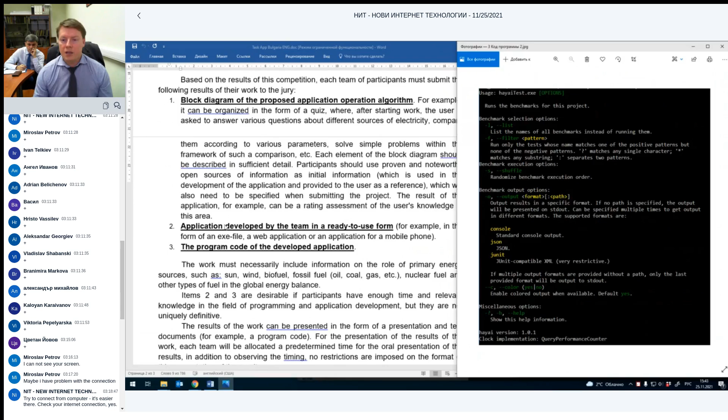And for example, other teams make their own decision and use their own computer application program code. And of course, if we choose between this and other teams, we will choose the team which uses open computer code.

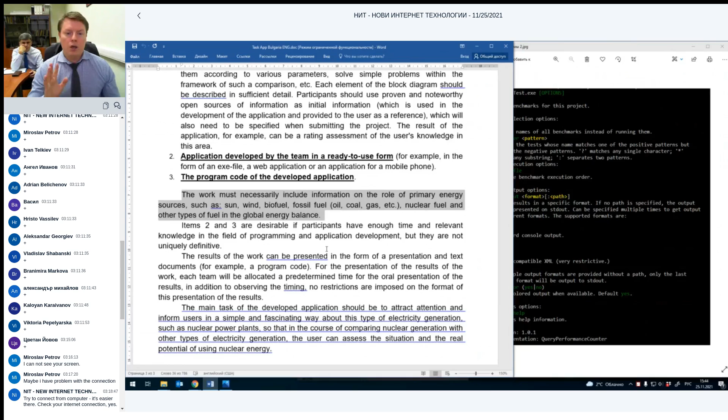And one of the important moments: your final result must include the quiz, question, photo, and step-by-step explanation dealing with not just one or maybe two sources of energy. Your final result must include information about nuclear energy, sun, wind, biofuel, and how, for example, my colleague Alexander Nahabov explained for you 20 minutes ago.

And if you listened correctly to the lecture, my colleague explained the plus and minus parameters of all kinds of primary sources of energy. And of course you may use this information, and you have open internet resources. You may open different websites, Google, Yandex, the Rosatom website, and other resources. But all information about all primary sources of energy must be included in your final result: sun, wind, biofuel, fossil fuel, nuclear fuel, and maybe other types of fuel.

Maybe one more point here. Each team have your own decision about how this team will work. For example, you may sit in one room and during one day prepare your final result. Or, since nowadays we have a pandemic situation in all the world countries, you may sit in different parts of a country and work together using online tools. And you may use different operating systems, for example Microsoft Windows, Mac OS, Android, and others - it's up to you.

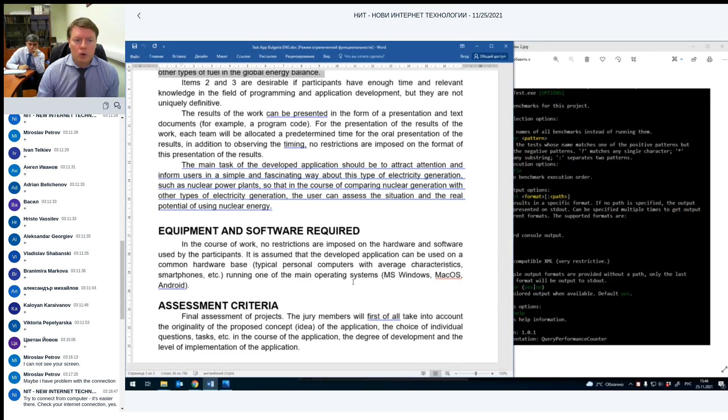An important moment deals with part number 2, your final result. This final result must include an exe-file. And when you drop all this information - important moment - you must drop this information before we start our final session tomorrow.

I think it's 2 p.m. Sofia time. Dear colleagues, according to the information that I have, the start of the presentation will be 3 o'clock. Yes, and we start exactly at this time for the presentation, but all teams must load your final result before the start.

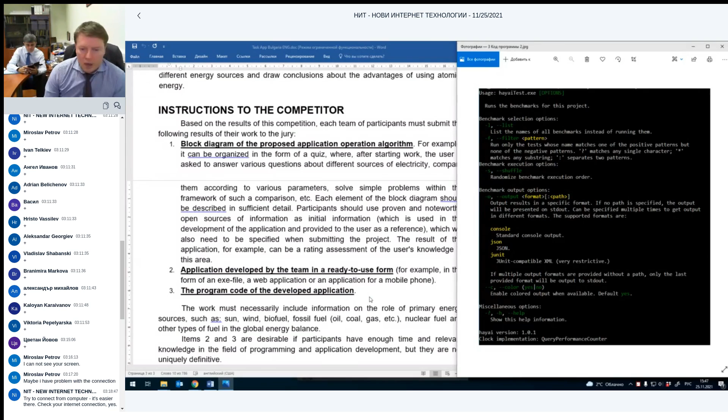Okay, it's maybe about where they should load it. Maybe it will be just in time, for example before 3 p.m. Sofia time. Okay, I may drop my Gmail right now, just a second.

So you will provide your Gmail space for where they should upload their results. It will be my own Gmail, and the whole team will use it.

Okay Dmitry, there is some important point. You said that they should provide some executable file. If you provide it by email, the antivirus will remove any executable attachments, including even if they are archived. The best way is to provide space on Google Drive or something else.

Yes, I understand, but we had the same situation previously, and the team may include all 3 points in a zip file, load it inside the cloud, and drop a link for me on this mail. I upload this information on my computer, and it will be like our safe moment.